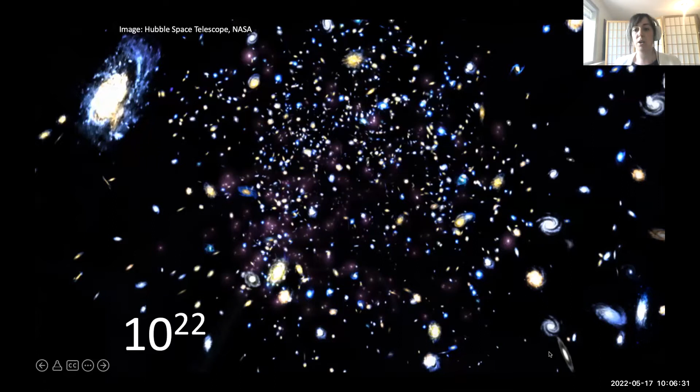One of the most universal feelings everyone can relate to is being out at night somewhere outside of city lights, where there's not a lot of light pollution, and you look up at the sky and see all the stars, and you get that feeling of being really small, but at the same time it's really pleasant. There are 10 to the 22 stars in the known universe, and that's a lot, but it's absolutely eclipsed by the number of microbes here on planet Earth.

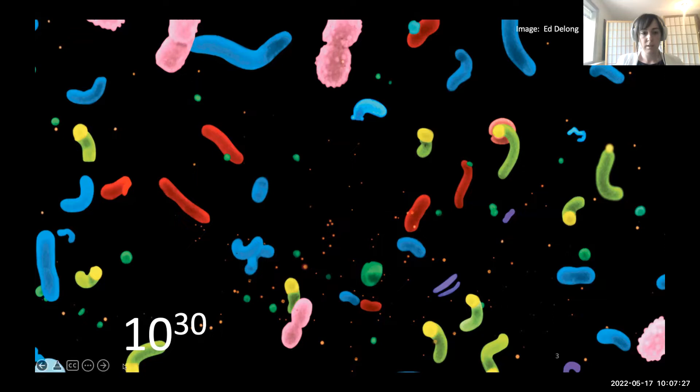Microbes don't live in isolation. Often when I say I'm a microbiologist, people think microscopes, they think plates, they think E. coli. All those things are true, but I've never used a microscope in my life, and I don't grow microbes. We don't grow them because most microbes, well over 90%, some say 99%, 90 is probably more accurate, can't be grown in the lab to the best of our knowledge and technologies today.

People often say, well why? They're so small, like, why can't you grow them? And a good way to think about it is this.

If there was a giant that was studying humans, and they knew something about you, like, yeah, eats a lot of corn, eats a lot of beef, breathes this nitrogen-oxygen atmosphere, and they scooped you up and put you in a little box with the right atmosphere, then dump a bunch of corn and a cow in there, you're not going to live that long. What's going to take care of your waste? How are you going to cook that cow? How are you going to butcher it? What are you going to do with a live cow? Not a lot. And what are you going to do with a couple kernels of corn? Nothing. You're just going to slowly die.

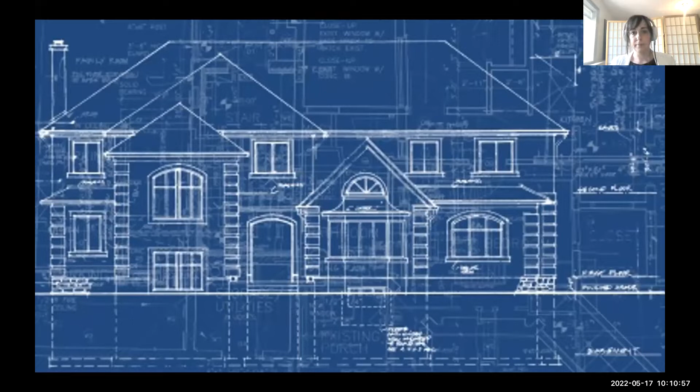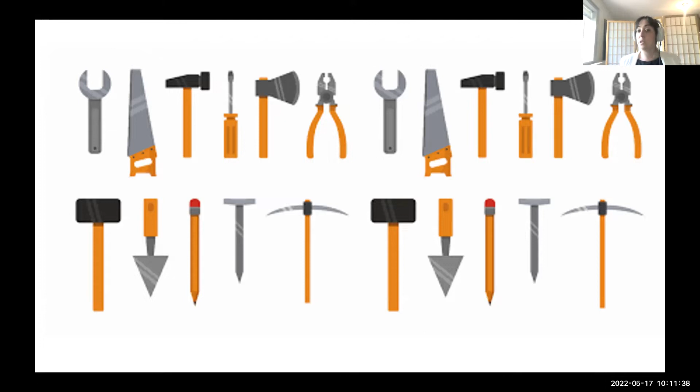So when we work with DNA, we're working really in the matrix — we talked a lot about that, there's a lot of great analogies with the Matrix movie. We get these huge files of A's, T's, C's, and G's, just the 4 letters of DNA that encode for all life on this planet. So we get these massive, massive text files, amounts of data, and we're trying to understand from there: who's there, what are they doing, who's doing what, how do they respond to change? These are the fundamental questions we're always trying to answer.

And we do this at Koonkie in a bunch of different industries. We've done everything from wine, where we're looking at yeast genomes to see what changes the flavor — what's the difference between wines in BC and wines in Italy, according to the yeast genomes, again going back to that idea of toolkits. Work in agriculture, work in astrobiology, where we're asking what can we learn about microbes in extreme places on Earth that we could use to look for microbes out in space. If microbes can live in places on Earth most similar to conditions in outer space, those are good analog environments for studying what's here and what we could do there.

We also have done big projects on baby poop, adult poop too, but it's less cute, and climate change, and now mining. These are the questions, again, that we're asking in all of these scenarios.

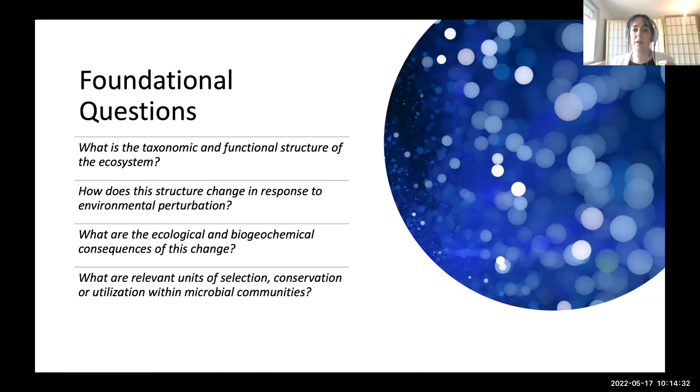They have been cycling things over and over and over, millions and millions of years before we were even remotely a part of this world, and they're going to continue to do it after us. So what can we learn from microbes in terms of becoming really efficient and developing technologies across industries?

Some nice examples of this really are sonar copying bats. Bats can plug their ears when they're screaming so that they don't deafen themselves, and sonar got developed after that. We also see some really cool prosthetics developed after animals that are really fast.

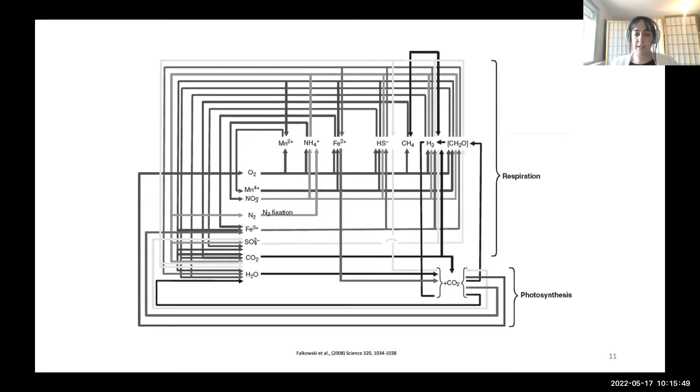And all of this to say, you hear the phrase, we don't want to reinvent the wheel again and again and again, and then we bypass biology that has already solved that problem and essentially try to reinvent the wheel. With microbes, we're trying to say, no, let's figure out how this wheel works here, and then let's apply that. Let's learn from what's already on this planet, and let's learn from what nature can tell us.

So this brings us to this really big project, the MMAP, the Mining Microbiome Analytics Platform. It is absolutely an amazing project. Mining is at this point where a lot of the chemical and physical solutions are kind of tapped out—this is my understanding. I'm a total dilettante in mining, to be clear. Microbes, yes. Mining, still learning.

But my understanding is that there are these declining grades of ore, and so we need to be able to get minerals and value-added products from lesser quality materials that are harder to get those things out of. Also, from every interaction I've had with mining companies, they really want to be able to do right by the climate and meet their climate goals. So they're saying, what can we do with microbes to really improve this industry and improve this planet?

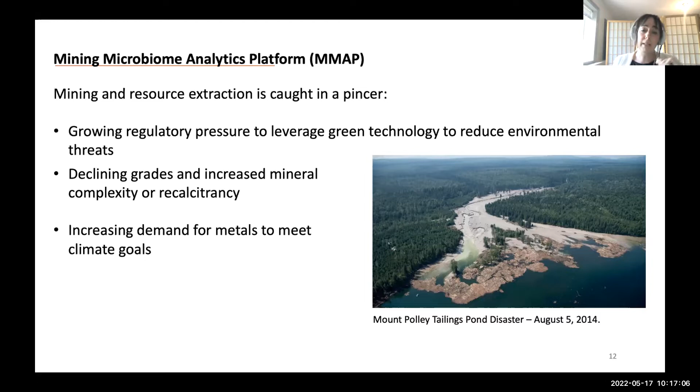And we need mining. We have to electrify the grid—that's pretty well established, and we can't do that without mining. So we're really trying to develop technologies here that are green and reduce environmental threats. We're doing that with data—we're doing that with microbial data in the case of MMAP.

We're starting with tens of thousands of samples, which is a lot—it's a lot of samples. To put this into perspective, we did a pretty wide search in the public databases of microbial DNA data, and there was just under 450 available samples.

If you look at wastewater, there's about a couple thousand. However, most of those are municipal, so it's not really what we're looking for here. So if we're being generous, we could say there are 700 mining and mining-adjacent samples publicly available. We're trying to get several orders of magnitude more data from these sites.

Why is that important? Because we're discovering so many new species, so many new genes. Everything is about comparisons. Because DNA is not a blueprint, we can't just look at the genomes of one community and know what they're doing. We have to be able to compare them to other known things and to each other in order to figure out what those genes are, who they are, and how similar these sites are to one another.

So we need all of this data to really lay that analytical foundation before we can start to ask really good questions and develop really exciting technologies. And so MMAP is kind of doing all of that work. So we have everyone from mining companies, synthetic biology companies, laboratories, software developers, bioinformaticians like my team, to really come together and put all of this together.

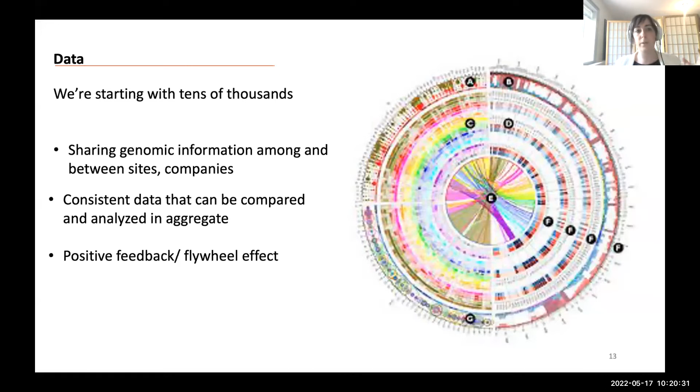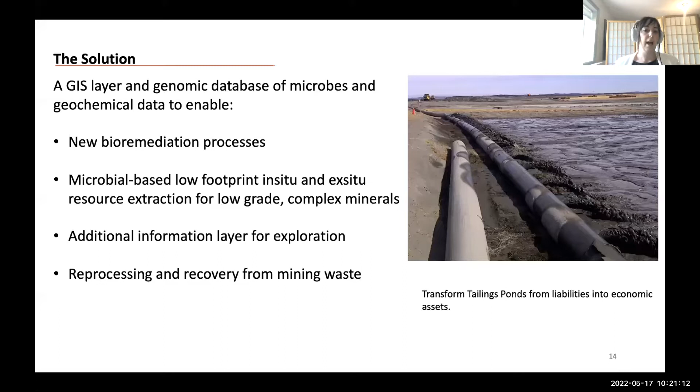So we're getting this genomic database of microbes, and it is abstracting all of the bioinformatics work that needs to be done. So what that means is that MMAP will actually take care of all of the work from going from those big text files to a human readable interface that one could interact with, ask questions of, search, do analyses within the platform, so that we can enable things like new bioremediation processes, low footprint resource extraction of low-grade minerals, and it's really this additional layer of information.

So we know that these technologies are promising. There's some early work actually out of UBC that shows that there might even be microbial fingerprints for what's deep below the surface. And so imagine you can go and take a sample that's shallow enough to be dug with a shovel, still hard work with the shovel, but could be done with the shovel, and send it to a lab for about $100, process it within the MMAP platform, and get a probability score of how likely there is to be something of value beneath the surface.

That is low impact, it's affordable, and it's pretty fast. And so technologies like that are not yet here, but they could be. And so these are the types of things that we're looking to develop, in addition to some of these other things on the slide. So what is the suitability? How can we use microbes to monitor the remediation of legacy sites or improve the remediation of legacy sites? And then this idea of novel gene and sets of genes, gene cassettes for enzyme discovery and pathway engineering.

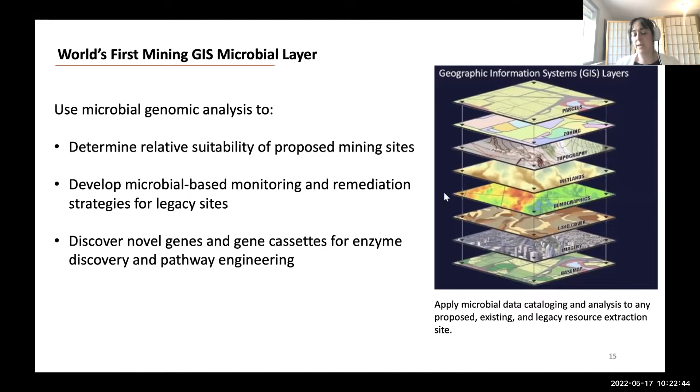And so synthetic biology can be a really powerful tool, but you can't start from nothing. And so we're really trying to give the whole process this kickstart and say what would normally take people months or years to do, they should be able to do in hours or weeks within the MMAP platform because of the data and because of the tools that are within it.

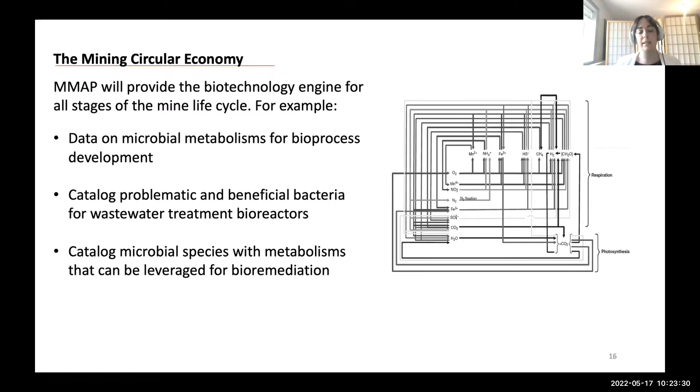So really great way to catalog things that are problematic, for example. So if one mining site is having a problem with a particular bug, it's very likely that that's not an isolated incident. We'll be able to do things like that are more flexible.

We know that these things can work. So there's already metal-eating bacteria that can go pretty quickly. And they can eat nails like within days. And then we can do this biohydrometallurgy processes. But we need to have this georeference framework for the basic and applied research. And that's really what the MMAP platform is all about.

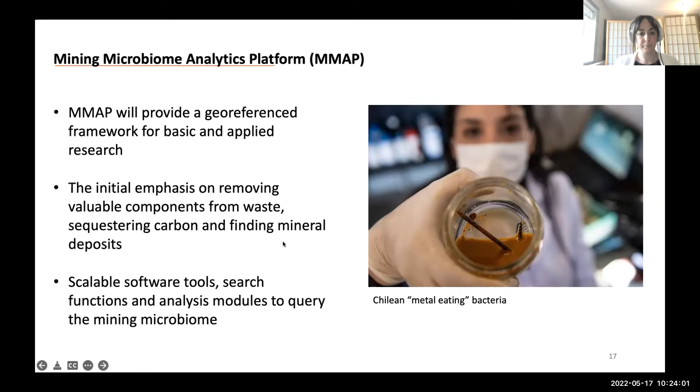I'll leave you with this final thought that I really like, which ties back into the space theme at the beginning. I'm always happy to talk about microbes, DNA, and bioinformatics. Stephen Hawking said 5 years ago that we need to find a new planet within 100 years. Whether or not you believe that to be true—and I don't, because I think there's absolutely no chance of that—it is true that we have not yet found collective and sustainable ways to maintain our own planet. I think we can look to microbes to start developing collective and sustainable ways, learn more about each other, and bring each other closer to one another and our home planet. So thank you very much.

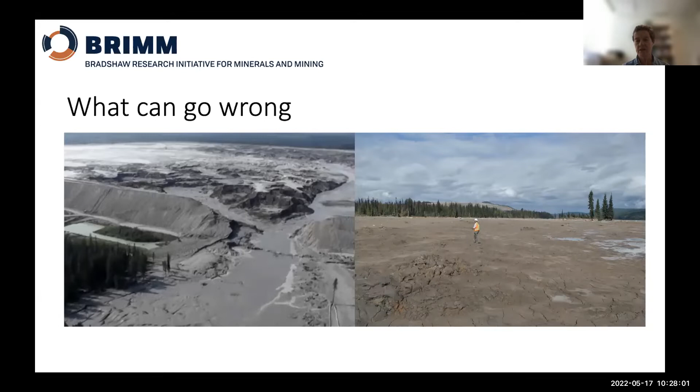You can see on the right-hand side, this used to be a forest. Now the tailings dispersed at this particular site have scoured away all of the vegetation, destroyed all of the trees, and covered everything with this hard-packed impermeable material, with potential risks from metals that might be leached out of it.

In this context, the mining industry is facing major challenges in order to meet the United Nations sustainability goals. These include improving environmental stewardship, adjusting to climate change by adopting carbon-negative technologies, and addressing water scarcity and equality by implementing less use of water, better quality control over existing water, reuse of water, etc. All of these things will benefit the mining industry as a whole, enable them to manage their risks better, and have more reliable processes to sustain the supply of essential metals.

So if we look closely at the structures that are on mine sites, we'll realize that these largely geochemical environments are not totally devoid of life, especially with respect to microbial activity. The field of biogeochemistry studies life at mineral microbe interfaces. And we have organisms that we call chemolithotrophs, which literally means that they live off of rocks and chemicals and don't require carbon compounds derived from plants.

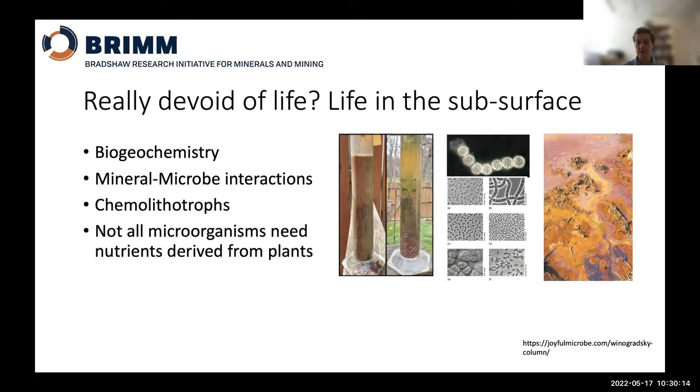However, challenges still remain with mine-impacted water treatment, especially with respect to their cost and reliability. Also, not many of these current solutions are capable of recovering the metals from the water. So the metals are taken out of the water, but they end up in the sludge of the bioreactors, and the sludge accumulates on the site. So you still have a risk and a liability to manage. And so we need to improve these water treatment systems - improve their reliability, do it in a more cost-effective way, and also be able to recover some of the metals.

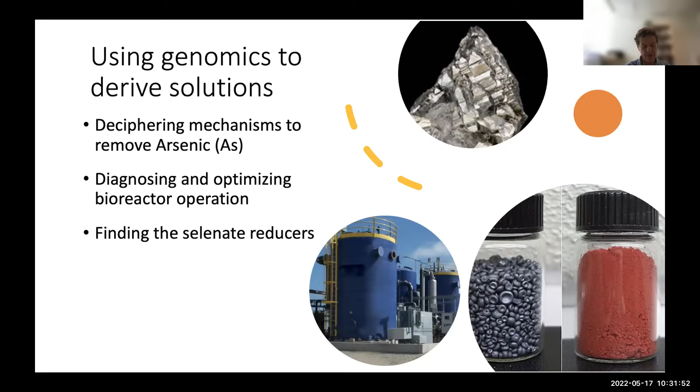So I'll describe three different processes that we've studied. In a first iteration of a nature-based process that looked a little different from a natural grassland, we used a waste product from another industry as a slow-release carbonaceous material to support a microbial community. This treatment system was quite effective, removing 30 tons of arsenic per year and 230 tons of zinc per year.

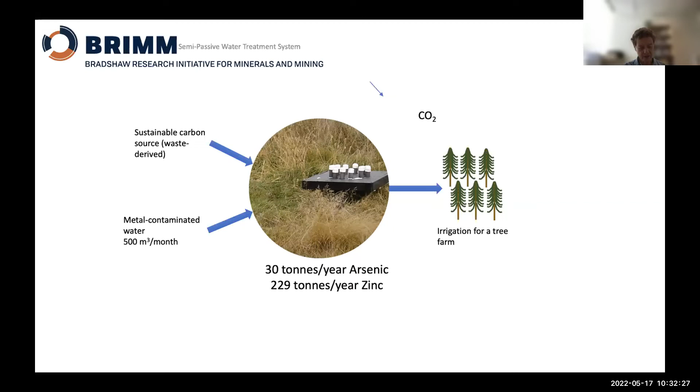However, it reached its end of life. It's unable to operate in perpetuity, but it presented an opportunity to understand the mechanisms taking place in this process. Using genomics, we were able to identify who was there. Based on our knowledge of these taxonomic groups and what they might be doing, we were able to reconstruct the mechanism happening inside this wetland - what were the different steps and what organisms were involved in those different steps.

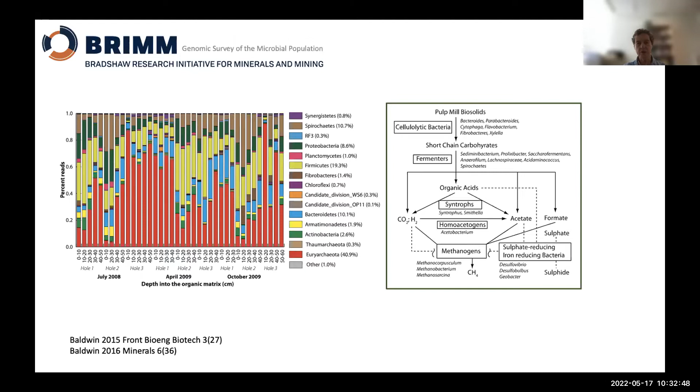We were able to take this even further, where we collected the DNA from this treatment system, took pieces of it, and inserted it into a laboratory bacterium. This laboratory bacterium was then subjected to a functional test to check if some of these pieces of DNA conferred a trait that allowed them to resist arsenic, grow in an arsenic environment, and transform arsenic from one species to another in order to facilitate its removal.

And so from this information, from the genomics and also from all of the geochemistry and mineralogy that we performed, we were able to reconstruct the mechanism taking place in this successfully operating system. Now, armed with this knowledge, we're able to take this mechanism and recapitulate it in several newer versions of this treatment system that we can now make operate in a more reliable way and for longer periods of time.

However, these treatment systems have an advantage over the more natural treatment systems in that because everything is in a tank, you can control the conditions inside it. You can control the pH, the temperature, and the nutrients added to the bioreactor. Having this better control, maybe we can manipulate the environment to match the exact organisms we want to grow in that environment. However, this sometimes doesn't work.

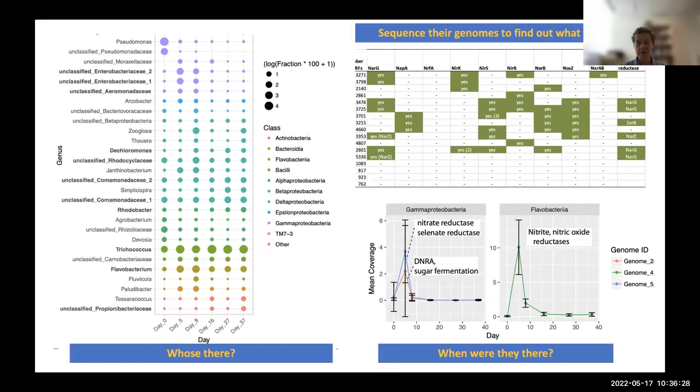The last example I'm going to give you is more of a discovery level. Selenium is an element of concern at many mines, coal mines, metal mines, and also coal-fired power stations. It's of concern because once selenium gets into the environment, it bioaccumulates up the food chain and causes developmental defects in fish, birds, and other animals. It turns out you can remove selenium using biology because there are bacteria that metabolize selenium and turn it into elemental selenium, which is a really good idea because you can take that and do something with it. But there are many different ways microbes can metabolize selenium, and we know very little about them because this area is very understudied, and there are only a handful of organisms we know of that can do selenate reduction.

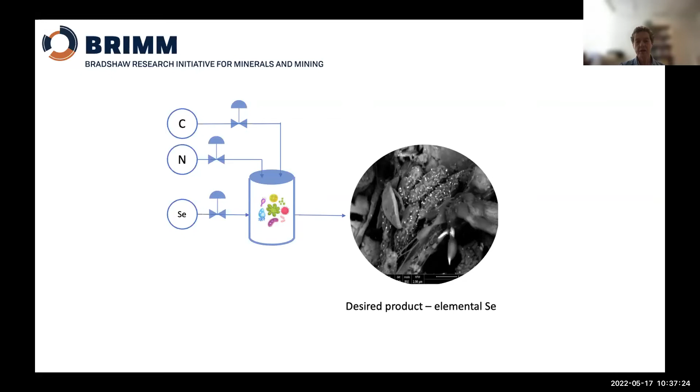So we can run bioreactors and do experiments in the laboratory to learn more about what organisms grow in these selenium-rich environments, what their capabilities are, and how we can manipulate them, for instance by feeding them different types of carbon sources. This allows us to discover many more microorganisms that have this trait, the ability to metabolize selenium as a specialization, not because of versatility in their enzymes. So now we can find out how to get these organisms, how to culture them, and how to use them.

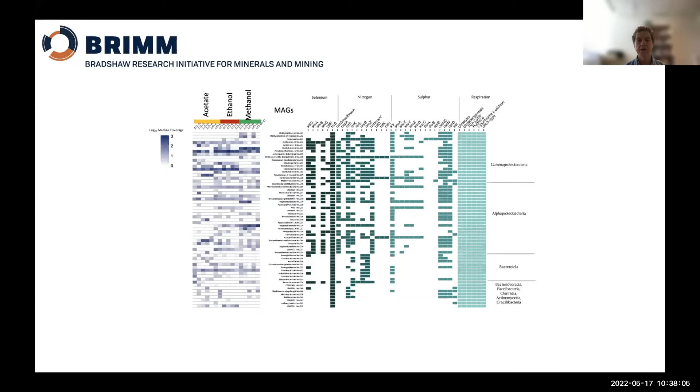I've just given you a few examples of what we've done to date, but there are many more things we can do based on nature-inspired microbial processes. Overall, we want to pivot away from the use of chemical reagents. There are many biopolymers produced by microorganisms that can chelate metals. We want to turn the concept of waste into a recovery of value. For instance, e-waste: we can recover metals from e-waste by leaching it using organic acids produced by microorganisms, and overall just gravitate towards a more ecosystem-based, climate change adaptation approach of increasing biodiversity and conservation in the industry.

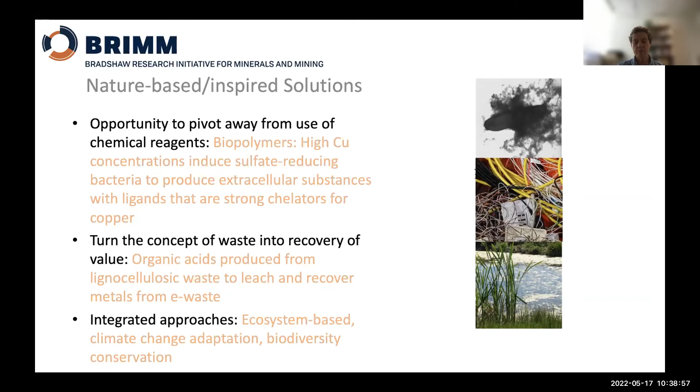Thank you, Sue, and perfectly on time. I should mention that Sue's original research into selenium and discoveries in the Elk Valley led to Teck's solution for bioreactors. Sue's been working on this for a long, long time and really is one of the world leaders in this field. So always very exciting to hear Sue talk.

I'd like to turn now to Bill Burton. The MMAP consortium is a very big consortium of companies working at the cutting edge of biotech solutions for mining, and one of our long-term partners is BGC Engineering. You would have thought, what's an engineering company got to do with biotechnology? Well, BGC is a very innovative company, and Bill's been a long-term supporter of this work for many years. So over to you, Bill, to talk about your applications.

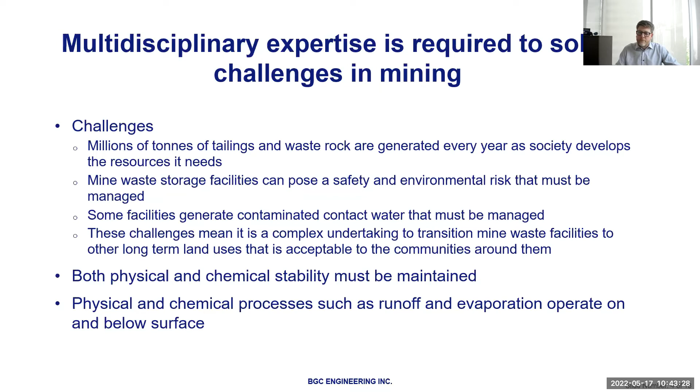So I believe that biotechnologies can play a role in these challenges. For example, what if we could harness some natural microbial processes? Sue's already given us examples. What about the ones we see operating in coral reefs, where cement is grown, heavily influenced by microbial activities, or in our teeth for that matter?

Could we get to biocementation, to microbially induced cement? Could we use that to strengthen tailings and waste rock? Could we use that cement to mitigate seepage? Microbial processes will often generate gas. Can we use that gas to desaturate tailings?

People are studying this: bioreactors to treat contact water, Sue just showed us those. Bioleaching, biofilms to recover ore, reduce contaminant generation. I've highlighted biocementation and tailings here because that's what I'm going to talk about the most, but we do see opportunities in all of these processes.

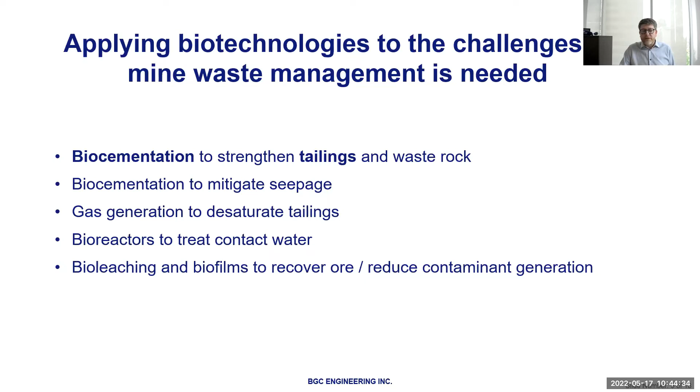So research in using microbes to amend the properties of soil is present and increasing in geotechnical engineering. This year, the American Society of Civil Engineers awarded one of its most prestigious awards, the Terzaghi Lecture, to Dr. Ed Kavazanjian for his work on biomediated solutions in geotechnical engineering.

He talks about a few different processes in there. The lecture is available on YouTube. I do recommend it if people want to see this side of these technologies. In his lecture, he talks about MICP.

What is MICP? Microbially induced carbonate precipitation. It's quite well studied, been in the geotechnical literature for 15 years or so. This work is generally focused on improving the conditions of natural soils, being studied to resist liquefaction from earthquakes and generally behave better under civil structures. The scale of the research work ranges from beakers to small site studies.

I'll describe it, but as I show a bit about it, I want you to think that a lot of this research and technology development has been done in an environment where the leading edge tools that Aria and Sue were talking about were still in development. So even though it's been around and has some basis, there's work to be done here.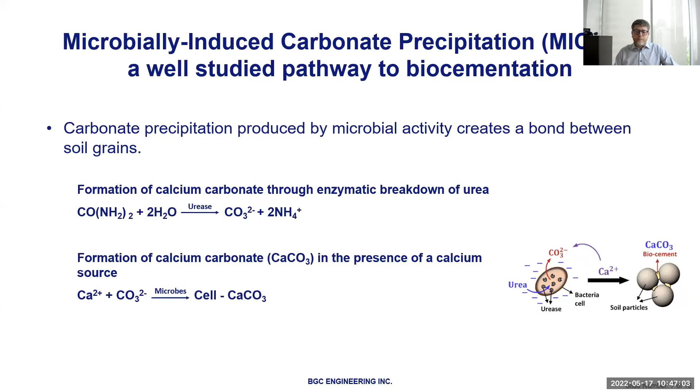So what's the goal? The goal is to bond tailing, sand, and silt particles together to increase strength, making it safer and less costly to contain these wastes, easier to reclaim, easier to place covers. If we can make tailings less permeable, if we can fill pore spaces, we can reduce formation and control where contact water goes.

We can improve chemical stability. We can coat reactive minerals. We can reduce that water and airflow that drives the reactions, and maybe the cement has some buffering capabilities.

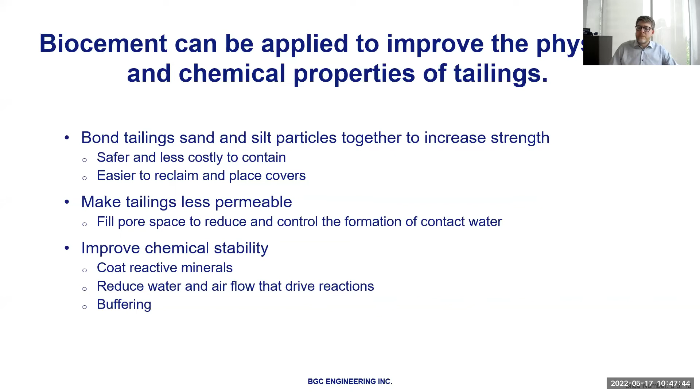But the question is, can we go from the laboratory to an economic deployment in the field? The top left photo shows bacteria working around a calcite crystal. On the right is a scanning electron microscope image of a grain of tailings with calcite crystals forming on it. This is work my colleague Nicole Woodcock did at Queen's.

So can we go from that scale to the big world scale? Tailings facilities are complex. They have different areas—some wet, some dry. Some of the tailings are coarse, sand-sized, some are fine. And there are all these weather influences going on around them in the processes I mentioned.

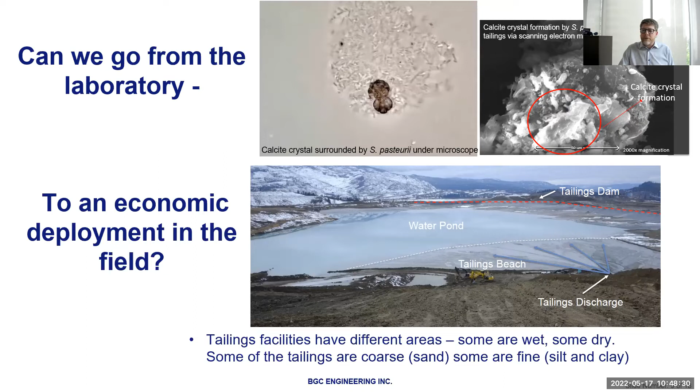So field scale application will depend on local conditions. In this sketch, this schematic, I've got a conceptual tailings facility. There's an engineered structure, a tailings dam around the edges that controls and contains the waste. There are tailing solids that are loose, wet, possibly might flow if released by these structures. There are ponds of water on top.

So characterization will be required. Aria's discussion about MMAP is the perfect tool for this, and it's opening new doors, because cementing microbes may already be present, or maybe they're not present and we have to introduce populations—but we don't know yet in most cases. Fluids with microbes and nutrients can be applied to stimulate these populations in critical areas.

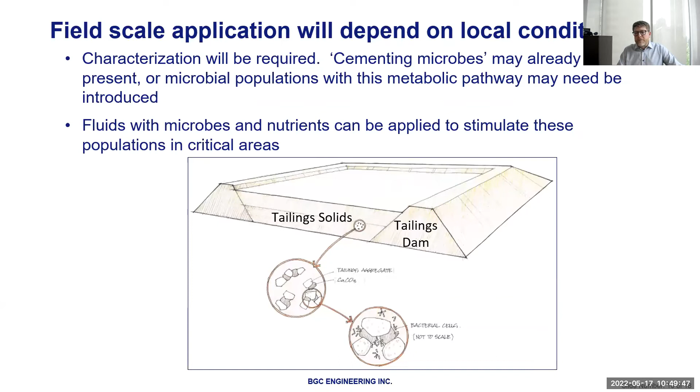We can start to engineer. The little cartoons here show what we're thinking about, where we've got bacteria working away around a cell, creating the calcium carbonate or other materials—I'll get into that—that join these grains together and fundamentally change their physical properties.

I'm going to show a couple of concepts. They're aspirational—this is what we're working towards, and I'll say actively working towards. The first concept is an idea of surface treatment. Can we make a cemented crust on the top?

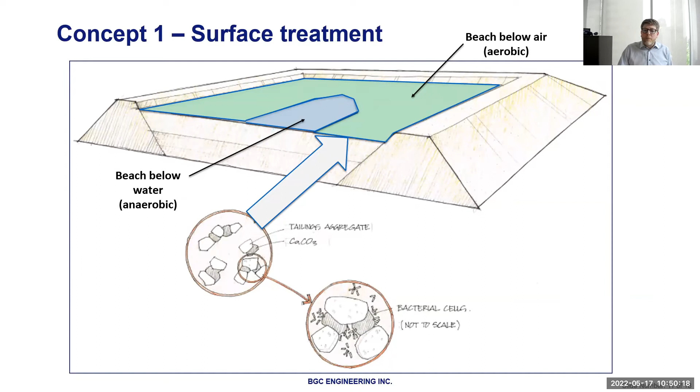It'll be tricky. We'll have to honor that some parts of the beach, what we call the tailings deposits, are below air, some are below water, so there's variable conditions. But if we could get to a cemented cover, it's going to increase the performance and reduce the cost of reclamation. It's going to reduce infiltration, seepage, and give us new capping options.

This figure on the right is from a paper that Gord McKenna and I and some colleagues of ours did a little while back. I'm putting it here to show that we do not need to have construction-grade cement produced to have measurable and tangible benefits.

What this diagram shows from left to right is increasing shear strength of tailings and the different options that come from that. On the left, when your shear strength is less than 5 kPa, you're in a boat or a hovercraft to traffic, and you can only move things hydraulically on top.

If you get above 5 kPa, maybe you can't quite walk on it yet, but you can float geogrid and other materials and start to very carefully, and in a very costly way, place material on top of it. If you can get above 25, if you get above 50, now you're able to use regular construction equipment. These are rules of thumb on these shear strengths.

But the point here is that 50 kPa—when we talk about strength of cement in industrial applications, we talk MPa. So we talk strengths that are 1,000 times what we're talking about here.

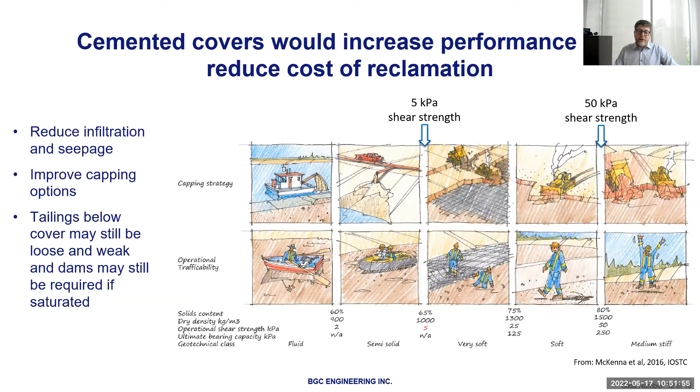This next concept is a bit more aspirational. Can we get cementation within the tailings deposits? If we can do that, maybe we don't need these containment dams. But there's work to be done.

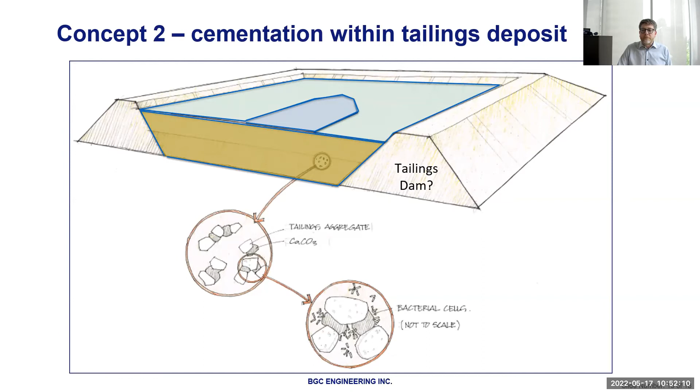I think, although there's all this MICP research and other forms of biocementation showing great results, we've got to keep doing the research to get it economical at a larger scale. Here are some thoughts I have on things we need to work on.

One is enhancing these MICP processes. The microbial processes, as we know them now, with the bacteria we know now, are slow and complex. So can we enhance them? Can we make them go faster? Can we come up with better ways to apply these materials?

Carbon sequestration deserves research. There can be CO2 inside these cements, so we can get a double bang here for our work.

And then we've got to get to these large scale field trials. We've got to test what we don't know. The in situ applications require a lot more resources, but we've got to go there, find out the controls of temperature and precipitation. We've got to develop construction methodologies and construction quality processes so that we could do this in a repeatable, sustainable, economical way.

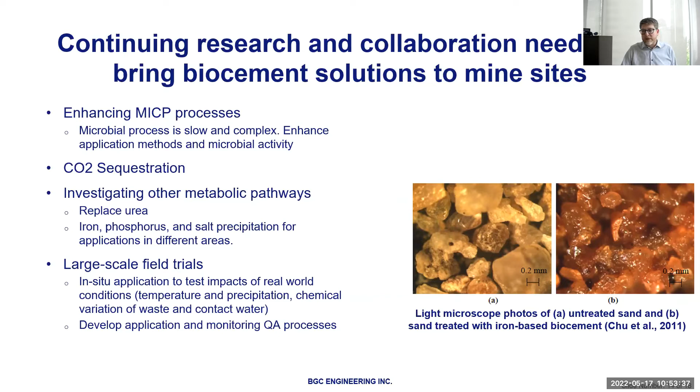I'll leave you with a closing thought: can we evolve the state of practice? Can mine waste containment shift to becoming landform engineering with an opportunity to enhance biodiversity? I am really looking forward to working with the folks at BRIMM and MICA and colleagues at MMAP and everyone on this call to find out. Thank you very much for your attention.

Thank you very much, Bill. I think you're getting a sense of how big this consortium is. If you really want to tackle a big scientific, technical problem, you need different angles to tackle it, and certainly the geotech angle and putting these solutions into the field is a key part. We don't have presentations here from our two main mining partners, Teck and Rio Tinto, but we certainly collaborate, and we really appreciate the support they give for this project. They're active partners, and we're taking samples from their mines to create solutions to things they're interested in. Finally, I'd like to introduce our last speaker, another member of the MMAP consortium, the industrial biotech company Allonnia, based in Boston but also with Canadian headquarters in Calgary. Bryne, I'd like you to talk about your perspective on the future of biotechnology in mining.

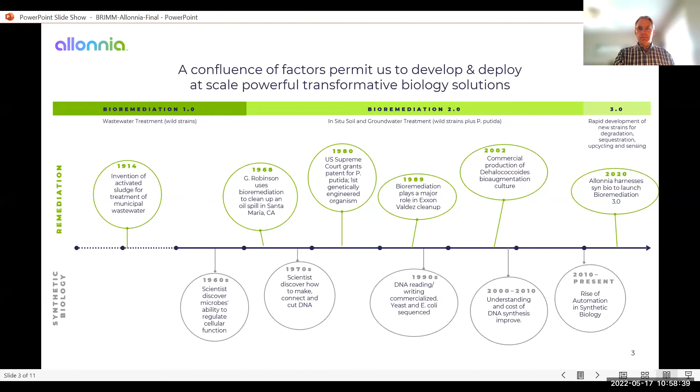As earlier talked about, and as Sue talked about in her presentation as well, the existing mechanical and chemical solutions are starting to reach their limits. And we need to find alternate methods of improving those, as well as how biology can play a role in those.

When you take a look at the things that have occurred, the urbanization, 70% of the world's population concentrated in cities by 2050. GDP growth, emerging markets, increasing the total waste globally. Sustainable inputs, talked about that in some of the earlier presentations as well, that raw materials are being depleted and are too expensive, and industry is demanding sustainable alternatives.

Regulatory focus - governments are imposing much more stringent regulations on all industries, not just mining. One of the earlier comments within the chat spoke about some of those very stringent regulations when it comes to selenium in the waters.

Public health - insufficient or harmful waste treatment is directly correlated to multiple health crises. And ESG - environmental, social, and governance. There is heightened organizational awareness of the goal setting to enhance overall ESG performance. At a level within the corporations, they need to understand that existing solutions are inadequate and do not meet the challenges that are in front of us, and that something else needs to be brought forth to help support that.

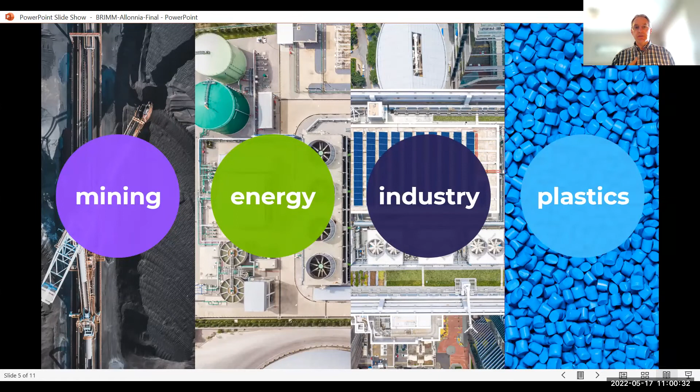At Allonnia, we're focused on 4 different areas where we can definitely see an opportunity for the use of biology: mining, energy industry, industry itself, and plastic upcycling as well. Specific to this presentation, though, we're very much focused on mining.

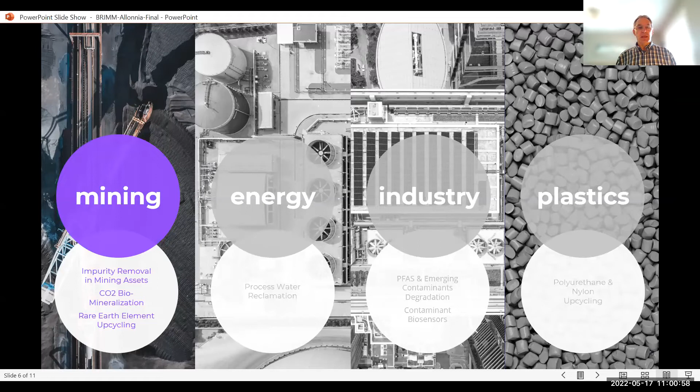Some of the opportunities for the use of biotechnology that Allonnia sees are impurity removal in mining assets. We see CO2 biomineralization - and this layers onto the earlier presentation from Bill at BGC - and then rare earth element upcycling as well.

And in the global industry, ore grades are declining. One of the earlier questions talked about rare earth elements, but ore grades are declining, and the easy ores are not as prominent as they were in previous decades. There needs to be new ways to process the tailings to identify opportunities, and with increasing costs, there's a need to minimize capital investments at these sites. Stakeholders are also demanding better ESG performance.

High profile environmental issues, disasters - Aria's slide showed the Mount Polley incident that happened in 2014. Decarbonization - mining is responsible for 4 to 7% of greenhouse gases, GHGs. Water stress due to climate change as well. And in Sue's presentation, she talked a little bit about the issue within mining and selenium removal from some of the waters as well.